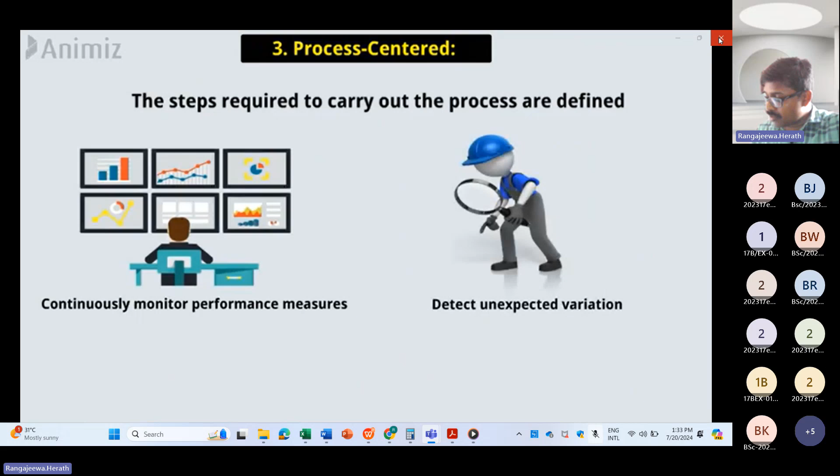3. Process-centered. A fundamental part of TQM is its focus on process thinking. A process is a series of steps that take inputs from suppliers and transform them into outputs that are delivered to customers. The steps required to carry out the process are defined, and we should continuously monitor performance measures in order to detect unexpected variation. 4. Integrated system. An organization should have an integrated system that provides effective total quality management. This may be an implied system, or one based on a quality standard such as ISO 9001, but it should be understood and applied across all functions and divisions of the organization.

5. Decision-making based on facts. In order to know how well an organization is operating, data on performance measures is mandatory. Total quality management requires that an organization frequently collect and analyze data, in order to improve decision-making accuracy. 6. Strategic and systematic approach. A significant part of the management of quality is the strategic or systematic approach to achieving an organizational goal. This process is called strategic planning or strategic management, and this includes the formation of a strategic plan that combines quality as a core component. Number 7. Communication.

During day-to-day operation and times of organizational change, effective communication plays a significant part in maintaining morale and motivating employees at all levels. Communication involves strategies, practice, and timeliness.

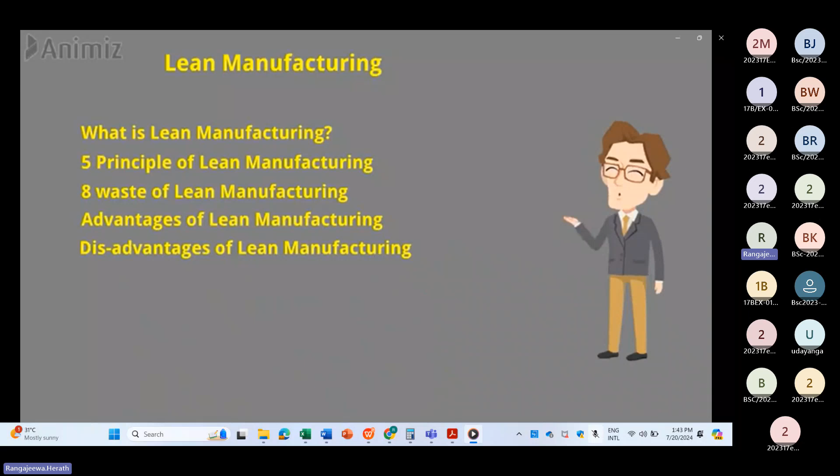Let's start the video. Lean manufacturing is a production process based on an ideology of maximizing productivity while simultaneously minimizing waste within a manufacturing operation. Many manufacturers are using lean manufacturing principles to eliminate waste, optimize processes, cut costs, boost innovation, and reduce time to market in a fast, volatile, and ever-changing global marketplace. To not take full advantage of all of your resources is to lose efficiencies, and in so doing, stunt production.

For many people, the phrase lean manufacturing is synonymous with removing waste, and eliminating waste is certainly a key element of any lean practice. But the ultimate goal of practicing lean manufacturing isn't simply to eliminate waste, it's to sustainably deliver value to the customer. Some well-known companies that use lean include Toyota, Intel, John Deere, and Nike, etc.

Now come to 5 principles of lean manufacturing. A widely referenced book, Lean Thinking: Banish Waste and Create Wealth in Your Corporation, which was published in 1996, laid out 5 principles of lean, which references core principles in many fields. They are value, the value stream, flow, pull, and perfection. Let's discuss each principle separately.

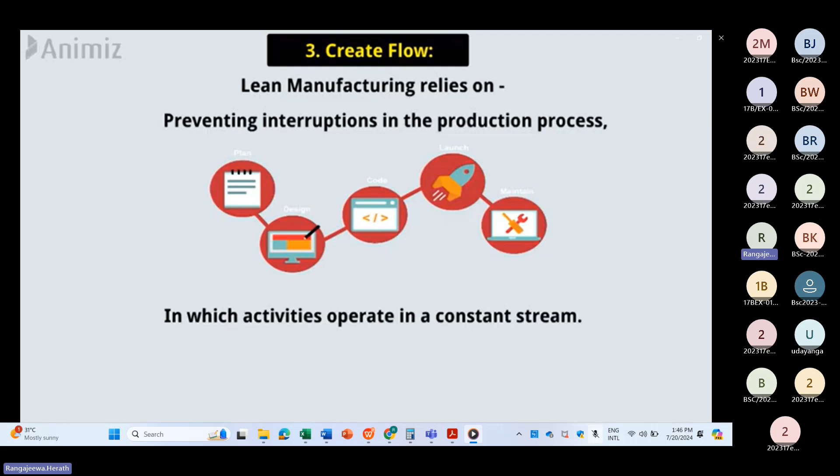4. Establish a pull system. Lean manufacturing uses a pull system instead of a push system. With a push system, inventory needs are determined in advance, and the product is manufactured to meet that forecast. However, forecasts are typically inaccurate, which can result in swings between too much inventory and not enough inventory. This can lead to additional warehousing costs, disrupted schedules, or poor customer satisfaction.

Lean manufacturing is based on a pull system in which nothing is bought, or you only start new work when there is a demand for it. Pull relies on flexibility and communication.

5. Perfection. Lean manufacturing rests on the concept of continually striving for perfection via continued process improvements, which is also known as Kaizen, as created by Toyota Motor Corporation founder Kiichiro Toyoda. It involves targeting the root causes of quality issues, and ferreting out and eliminating waste across the value stream.

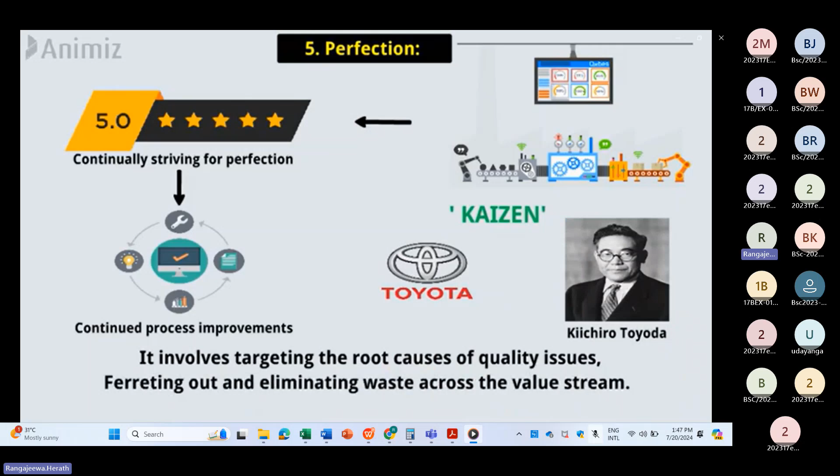8 wastes of lean manufacturing. The lean manufacturing framework that was originally developed by Taiichi Ohno for Toyota Motor Company has applications across every industry today. The original 7 wastes identified by Ohno have expanded to include one more related to an organization's employees. You can easily recall the 8 wastes of lean by using the acronym DOWNTIME.

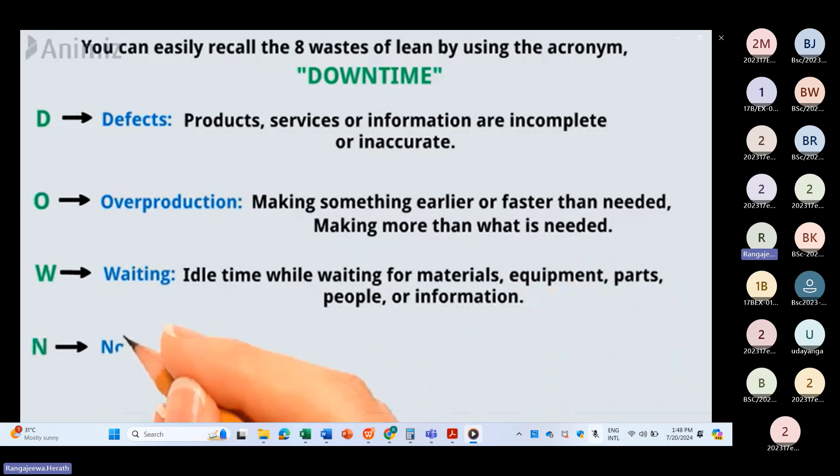D stands for defects. Products, services or information are incomplete or inaccurate. O, overproduction. Making something earlier or faster than needed. Making more than what is needed. W, waiting. Idle time while waiting for materials, equipment, parts, people, or information. N stands for non-utilized talent. Not fully utilizing the experience, skills, knowledge, or creativity of your team.

T, transportation excess. The unnecessary movement of products, equipment, or materials. I, inventory excess. Over-accumulation of stock beyond what is necessary to serve the customer. M, motion excess. Any movement by the team that is not of value to the customer. E, excess processing. Any additional steps in a process that do not add value to the customer.

Let's move on to advantages of lean manufacturing. Number 1. Saves time and money. More efficient workflows, resource allocation, and production can benefit businesses regardless of size or output. Time saving allows for reduced lead times, and better service in providing products quickly to customers, but can also help save money by allowing for a more streamlined workforce.

2. Environmentally friendly. Removing unnecessary processes can save costs in energy and fuel use. This has an obvious environmental benefit, as does the use of more energy-efficient equipment, which can also offer cost savings.

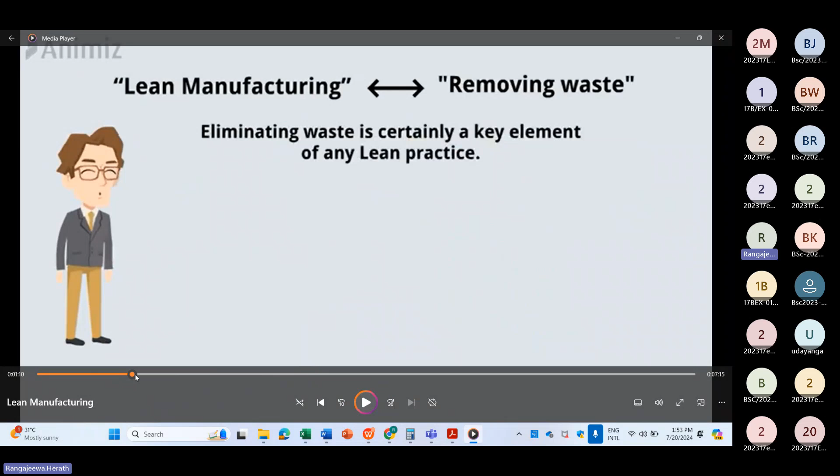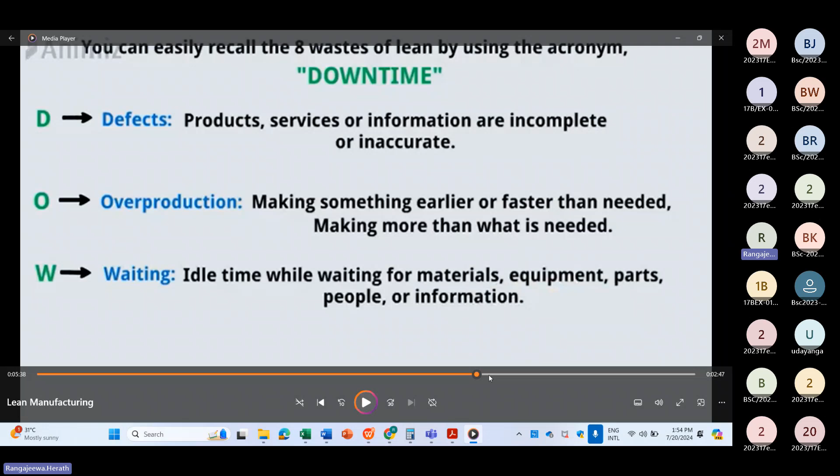So removing wastage is the key element of the lean practice. And then you find the main steps of the lean manufacturing process. This is a little bit technical, some advanced manufacturing related concepts are also used. So overall, you should know these main benefits from lean manufacturing.

One major benefit of lean manufacturing is to save time and money. There are two main principles, no? Save time and money. So how does lean manufacturing save time and money? It always focuses on more efficient workflows. Efficient workflows reduce time, and reducing wastage means that you are saving money. And more efficient resource allocation is focused on. So you can save time and money.

And productions are well-defined, smooth production. Then it is environmentally friendly, right? When you are removing unnecessary processes and cost in energy consumption, you can control there. So that will lead to being environmentally friendly. And finally, you have fast delivery, right? Best prices. So that will enhance customer satisfaction.

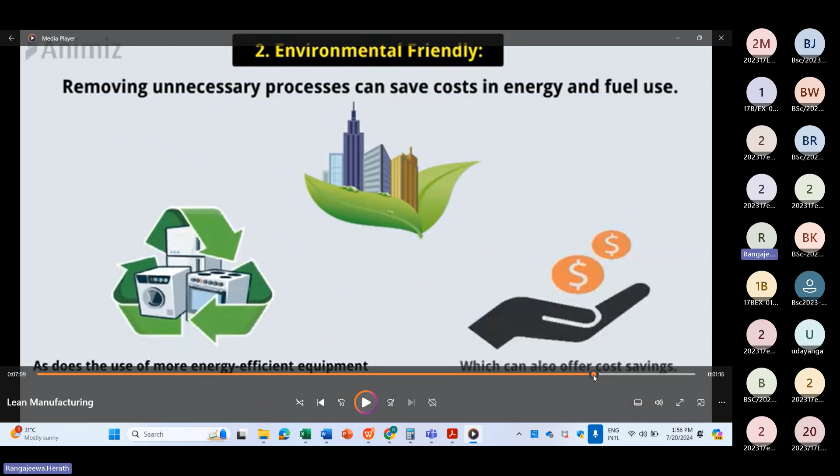Right? Those aspects. Right. Then we can take Six Sigma. This is another very famous technique. We can have Six Sigma and even Lean Six Sigma. We have the concept of Six Sigma together with lean manufacturing. Yeah, this one. First we look at the Six Sigma principal concept.

Imagine you've been tasked with a really important project at work. The company you're working for produces luxury cars. The production numbers are going down, and a lesser number of cars are getting manufactured each day. There also seems to be an issue with the quality of the windshield wipers. Is there a way for the company to stop the stall in production and increase the production per day from 1,000 to 2,000? Also, is there a way to find out what's causing the drop in wiper quality?

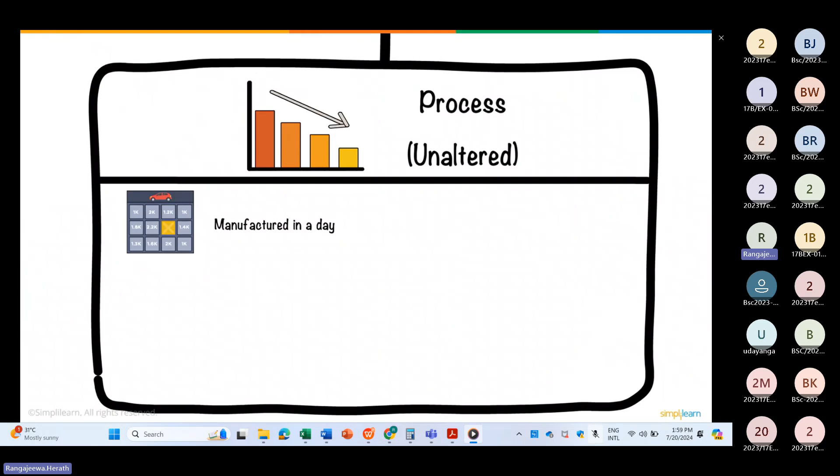In the Measure phase, you determine how the process is performing currently in its unaltered state. You determine the current number of cars that are manufactured in a day. In the current scenario, 1,000 cars are manufactured in a day, and each of these cars is outfitted with a pair of windshield wipers by one of 30 machines used. Some of the metrics measured are how many cars are produced in a day, time taken to assemble a car, how many windshield wipers were attached in a day, time that it takes them to do so, defects detected from each machine on assembly completion, and so on.

Following this, in the Analyze phase, you determine what caused the defect or variation. On analyzing previous data, you find out that one of the machines that installed the windshield wiper was not performing as well as it was supposed to. Production was taking longer since the car chassis was being moved across the different locations slower, as cranes had to individually pick and drop the frame. This was because the wheels were attached to the car only in the last stage.

Next, in the Improve phase, you make changes to the manufacturing process and ensure the defects are addressed. You replace the faulty machine that installed the windshield wiper with another one. You also find a way to save time by attaching wheels on the frame in the initial stages of the manufacturing process, unlike how it was done earlier. Now the car can be moved across the assembly area faster.

And finally, in the Control phase, you make regular adjustments to control new processes and future performance. Based on the changes made, the company was able to reduce production time and manufacture about 2,000 cars a day with a higher quality of output. DMAIC is one of the most commonly used methodologies in the world. It focuses on improving the existing products of the organization.

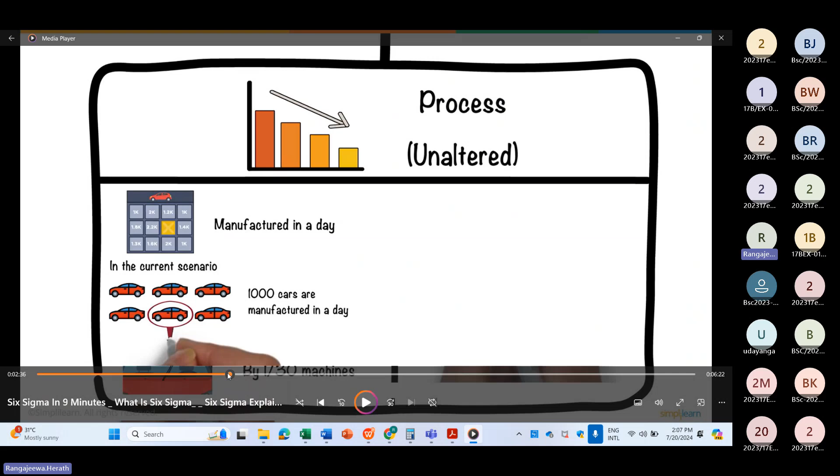So here it explains the application of this concept. What is define, what is measure, what is analyze. Right. So this video explained a particular example of an automobile industry, how they can solve that issue.

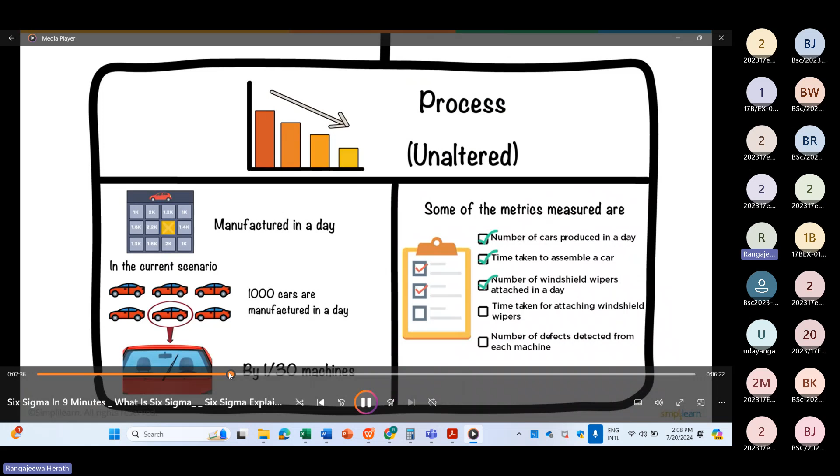Production was taking longer since the car chassis was being moved across the different locations slower, as cranes had to individually pick and drop the frame. This was because the wheels were attached to the car only in the last stage. Next, in the improve phase, you make changes to the manufacturing process and ensure the defects are addressed. You replace the faulty machines that installed the windshield wiper with another one. You also find a way to save time by attaching wheels on the frame in the initial stages of the manufacturing process, unlike how it was done earlier. Now the car can be moved across the assembly area faster.

And finally, in the control phase, you make regular adjustments to control new processes and future performance. Based on the changes made, the company was able to reduce production time and manufacture about 2,000 cars a day

Right. So it's explained with some practical example, right? Six Sigma. And then we can look at this Six Sigma concept with lean manufacturing, which we call Lean Six Sigma. Right? Concept of Lean Six Sigma. The final part of that video also addresses Lean Six Sigma, but we have a separate video to address Lean Six Sigma. So we'll take that also. Then I will emphasize some areas from an examination point of view, right, from these videos, what you will be tested on basically, right? So where you should be concerned. You should have more emphasis on these areas from these concepts.

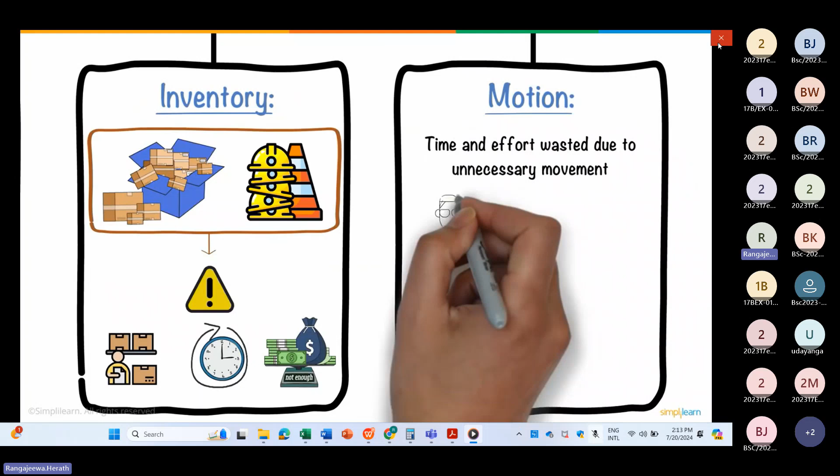2. Inventory. This waste occurs due to having more products and materials than required. This can cause damage and defects to products or materials, greater time for completion, inefficient allocation of capital, and so on. 3. Motion. This refers to the time and effort wasted due to unnecessary movement of people, equipment, or machinery. This could be sifting through inventory, double data entry, and so on. 4. Waiting. This can be time wasted waiting on information, instructions, materials, or equipment.

5. Overproduction. This is the waste created due to producing more products than required. 6. Overprocessing. It refers to more work, more components, or more steps in a product or service than required. 7. Defects. This is the waste originating from a product or service that fails to meet customer expectations. 8. Skills. This waste refers to the waste of human potential, underutilizing capabilities, and delegating tasks to people with inadequate training.

For years now, many systems have emerged that use the Lean methodology to identify and handle the different kinds of waste. Some of the more popular and effective ones are JIT, or Just in Time, 5S, and Kanban. The JIT methodology focuses on reducing the amount of time the production system takes to provide an output, and the response time from suppliers to customers. 5S is another methodology that focuses on cleanliness and organization while improving profits and efficiency.

Kanban is also another popular methodology to achieve Lean. It is a visual method to manage tasks and workflows. Kanban enables users to visualize the workflow to identify issues in the process and fix them. These methodologies help in optimizing the waste production and are often used together to maximize results. So that's the first problem solved.

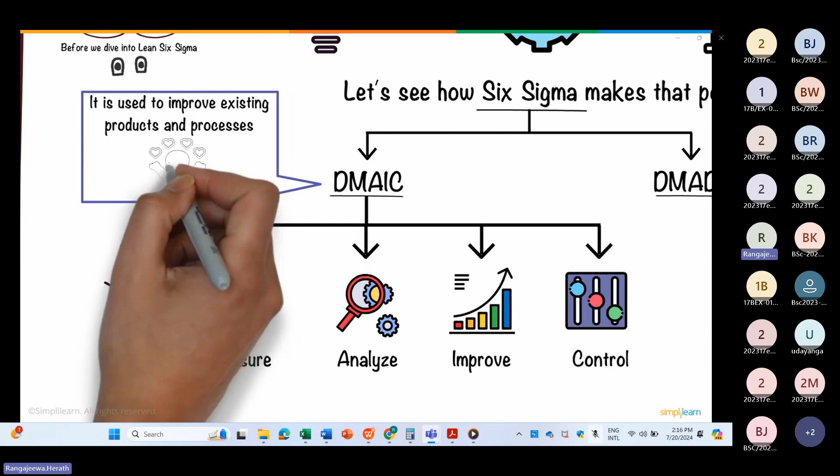Let's have a closer look at DMAIC, since Lean Six Sigma uses the DMAIC methodology of Six Sigma. DMAIC is an acronym for Define, Measure, Analyze, Improve, Control. It is used to improve existing products and processes so that they can meet the customer's requirements. In the Define phase, you determine what the goals of the project are. In this case, you want to reduce the amount of time taken to deliver milk from the warehouse to the supermarket, so that it is stocked on the supermarket shelves before 8:30 in the morning.

In the Measure phase, you measure the performance of the current unaltered process. The milk truck leaves at 7:30 in the morning and can take one of 3 routes: A, B, and C.

Route A is currently the preferred one, as it takes only 60 minutes to reach the supermarket, compared to routes B and C, which take 70 and 80 minutes respectively. In the analyze phase, you find out why the defects exist. Since routes B and C were school bus routes, reducing the starting time by 1 hour, at 6:30 instead of 7:30, meant avoiding the traffic. Routes B and C now take 40 to 45 minutes to reach the supermarket.

Route A still takes the milk truck 1 hour to get to the supermarket, even when the truck leaves at 6:30 a.m. In the improve phase, performance can be improved by addressing and eliminating the root causes. Now that you've realized that advancing the milk pickup by an hour and changing the route to Route B can save time, you changed the process accordingly, providing your workers with ample time to stock the milk into the shelves

before the morning rush. And finally, in the control phase, you make regular adjustments to control new processes and future performance. You continue to monitor the delivery times and try out alternate routes to continually improve the process and ensure even faster delivery. This process change led to reduced man hours and cost, enhanced sales, and customer retention.